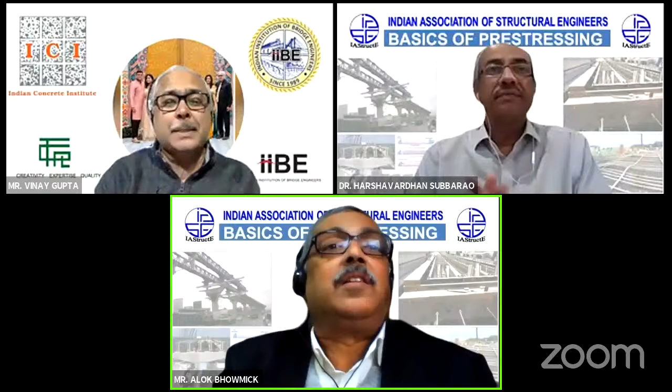This webinar is on a specialized subject, and it has a very wide application in India.

I think since 1955 onwards, we are using pre-stressing. Though many designers or participants here are aware about the method of pre-stress design, very few designers are well aware about the intricacies of the pre-stressing system, its technology, and the art and science of the subject. Very few people go deep into it, and therefore these webinars are really very enriching. I thank Mr. Vinay Gupta for agreeing to share his deep knowledge on the subject.

When I go to many bridge sites where pre-stressing goes on, even now, after so many years of experience in India, I find that either the pre-stressing has not been done properly, or it is not interpreted correctly, and the problem continues. There is a considerable knowledge gap between what should be done and what is practiced, and there are several quality issues related to pre-stressing which need greater understanding for designers. Today is the opportunity for many participants.

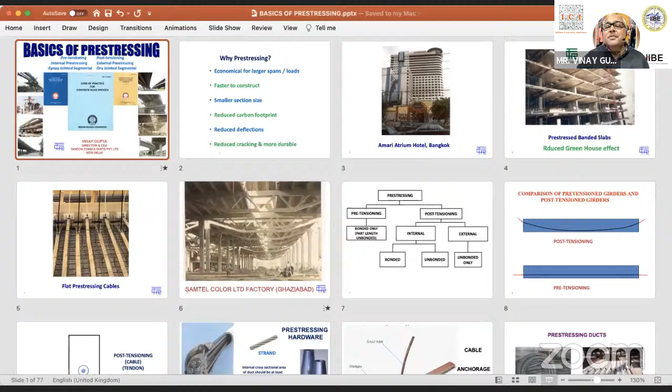Thank you, Dr. Harshavardhan Subbarao. Friends, I must tell you, although Dr. Subbarao has said so many things about me, I don't know right or wrong, whatever it is, but Dr. Harshavardhan Subbarao himself to me is a very nice, sweet, and perfect gentleman friend. And of course, I'm very thankful to IAStructE for giving me this opportunity to present something which I presented in IIBE about, I think, a week or two ago - I think 2 weeks ago perhaps. So my special thanks to IAStructE, of course under the aegis of the President, Mr. Alok Bhowmick, no doubt.

Friends, my presentation today is more elementary level stuff, so I don't expect very learned and senior people to gain much out of it. It's more for students, or those who exercise computers so much that they have forgotten what the reality inside is. Our office engineers too are some of those who just click numbers on the computer, get some results, and think the computer knows more than them. We want to know more than the computer. That's the purpose of today's presentation.

Dr. Harshavardhan already mentioned these two documents, SP65, which is for precast segmental bridges, or other segmental bridges, precast or cast in situ. The other one he mentioned is about pre-tension girders. So we will see what is pre-tension, what is precast, what is epoxy jointed, what is dry jointed, and how pre-stressing differs for each of these items, what is bonded pre-stressing, what is unbonded pre-stressing, and so on.

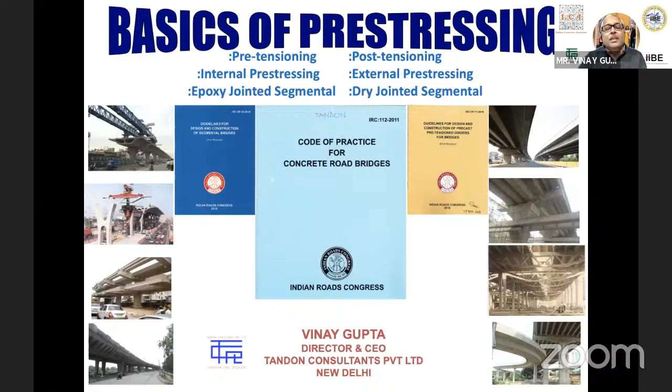Okay, let me see how this works, and let me put it to the pointer laser option.

So, a very simple question: why pre-stressing? Why couldn't it be done with just reinforced concrete or something like that?

When you provide pre-stressing in the case of larger spans, it becomes economical because the material consumption is less, therefore the self-weight is less. When you look at the overall economics of material, dimensions, etc., you find it can take larger loads for a larger span more easily in pre-stressed concrete than in reinforced concrete.

It is faster to construct compared to RCC, simply because with RCC, especially a cast in situ structure, you have to hold the shuttering and scaffolding for 15 to 21 days, 2 to 3 weeks, as per the codal requirements. Whereas with pre-stressing, once the concrete has gained sufficient strength, not time but strength, after 4 or 5 days you get about 80% strength in the range of 35 MPa, 40 MPa, or perhaps 32 MPa. You can decenter it after pre-stressing, which means you can do it much faster.

Section size is smaller, as I just mentioned. Once you reduce the concrete quantity, you reduce the quantity of cement. For every ton of cement manufactured, you produce about 1 ton of carbon dioxide. So once you reduce cement, you reduce carbon dioxide, and you reduce the carbon footprint on the planet.

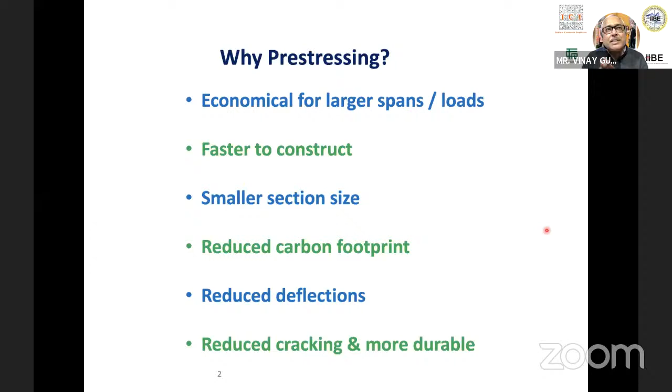When you pre-stress concrete, you act against the applied loadings, and since you do that, the deflections of the structure are reduced. In the process, since you are applying compressive force into the concrete, it leads to reduction in cracking. I would not say zero cracking, because nowadays we permit partial pre-stressing, which will crack also. But with reduced cracking, durability increases, because the passage for water, carbon monoxide, and carbon dioxide to ingress reduces. So it becomes a more durable concrete.

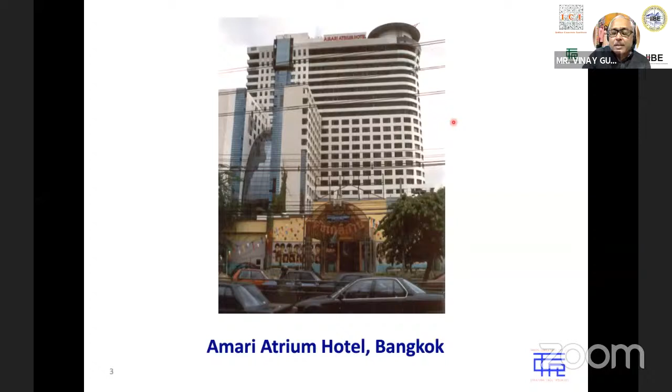I picked an example we did about 30 years ago: a 25-story, 4-star hotel building in Bangkok, the Amari Atrium. You can still go now to Sukhumvit Road and see it. The floors you see here are 20 typical floors with a dimension of 100 meters by 20 meters across the plane of this screen, and of course 20 floors. Now let's see how these were constructed.

The structure, in Bangkok, of course, is in a seismic zone close to nil. The grids of the columns are 8.2 meters longitudinally. The length of 100 meters is from here to the other end. We have these columns just 2 over the width of 20 meters, and these columns are 1.1 meter by, if I remember correctly, 700 millimeters.

Over these columns, we have a pre-stressed banded system. In the banded system, we have beam-type elements which are 40 centimeters deep in this case, in one direction. And we have slabs spanning 8.2 meters, from this column grid to this column grid, 200 mm thick, so 40 centimeters deep band, 20 centimeter slab. This entire floor, each floor, was constructed in 7 to 9 days, 30 years ago.

Today, these bands have pre-stressing longitudinally and transversely, and the slabs have pre-stressing in the other direction, longitudinal to the building. With this whole process, the speed was as high as completing 20 floors, 100 meters by 20 meters, in a matter of 6 months. Now look at the gain: the quantities are minimum, because 40 centimeters depth for a span of 12 meters, with a 4 meter cantilever, is about the minimum one can think of.

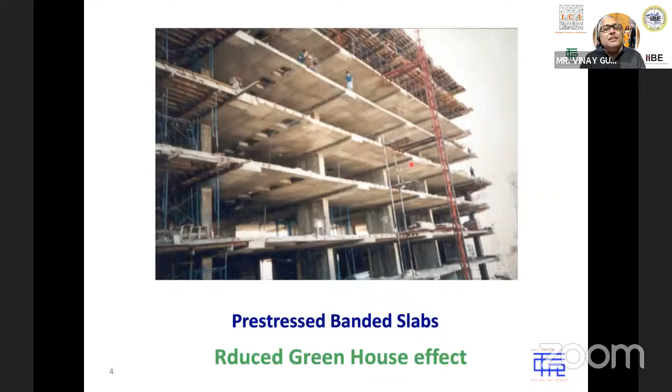A 20 centimeter slab for a span of 8.2 meters, which would normally require about 2.5 to 3 times that thickness, is also about the minimum you can think of. This gives quantity savings and advantages that finally reduce the greenhouse effect on the earth, which is what people talk about nowadays. For a hotel building, if you save the entrepreneur about 3 to 4 weeks per floor, he starts guest entry a year or two earlier, so his gains are enormous. The structure becomes cheaper, faster, and economical, letting the entrepreneur start earning faster. So those are the distinct advantages.

We have seen the normal round pre-stress system with round duct and round anchorage cone. But for slabs with only 4 or 5 strands in a thin slab, like this 200mm one, flat ducts are available where you put these strands depending on the design, spaced about half a meter to a meter apart, and provide pre-stressing. Notice one side has a dead end anchor and the other has the anchorage end, alternating so that we maintain symmetry of forces as far as possible.

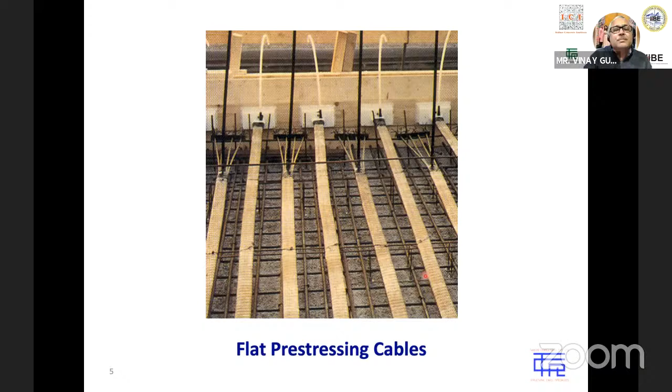This is a post-tensioned concrete truss for a large factory building constructed around 1989-1990, about 30 years ago. The concrete trusses have bracings, a top boom and a bottom boom. The bottom boom, which is in tension, is pre-stressed. Just by this pre-stressing, the whole structure became very fast and light for a span of 25 meters, with a depth of about 2.2 to 2.3 meters, on 10-meter tall columns, with trusses spaced about 10 meters apart. This factory was for manufacturing color picture tubes for old-style TVs, and they wanted to beat the competitors. The factory was constructed in 11 months for 25,000 square meters, 30 years ago, and people were really applauding.

Now let's talk about pre-stressing, back to basics. In pre-stressing, we have two categories: pre-tensioning, where you tension the tendons first and concrete later, and post-tensioning, where you concrete first and then tension the tendons. A tendon, in pre-stressing terms, can be a strand or a cable. Tendon is the common word, whether it's pre-tensioning with strands or post-tensioning with a cable. We'll discuss this further.

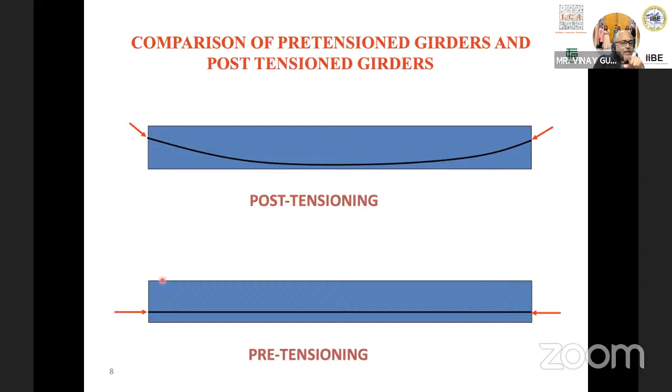So now we just talked about post-tensioning. In post-tensioning, we have a cable. What a cable is, we will see. Around the cable, we have a duct, which can be metallic or high-density polyethylene, HDPE. In this space, we normally provide some grout or the other.

If it's a bonded pre-stress, then we provide cement grout, so that from the cable we have cement attached, from the cement we have the duct, and from the duct we have the concrete. So everything becomes one bonded stuff.

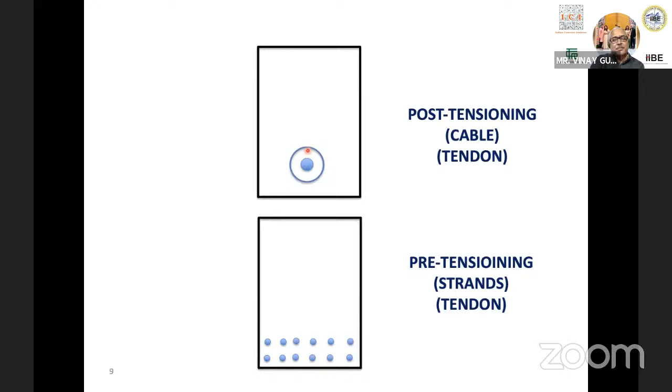If we want an internal unbonded pre-stress, we provide a flexible material like wax or grease, a selected quality wax and grease which have good life, 100 years and all that. Once you put that kind of material, the bonding between the pre-stress and the duct does not take place. Only protection takes place against weathering, because pre-stressing steel can get corroded faster than regular steel due to high stress.

In the case of pre-tensioning, we don't have a cable concept, we have a strand concept. Each strand is placed wherever we have decided to. After the strand is stressed, we pour the concrete, and of course reinforcement is always there already. Once the concrete gains sufficient strength, we release the jacks for the pre-stressing force on the strands to be transferred to the concrete.

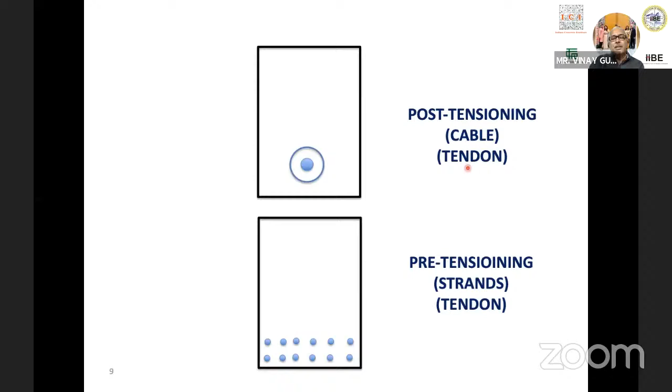You may notice a word, tendon, which is a common term. A tendon may be either in the form of a cable, a grouped cable, or in the form of a strand. International books, literature, and codes use this term tendon rather than strand or cable, because it's a common family of pre-stressing. All right, so let us see what a cable is and what the other things are.

What you see here is a strand. This one is a strand, but this whole thing is a cable. What is a strand? Let us see.

A strand comprises 7 wires. One is a central wire that we see here, and there are 6 outer wires. Stranded together in the factory, they make a strand which is a 7-wire strand, and in these strands, the central wire is 1.5% larger in diameter than the outer 6 wires, and that becomes a twisted strand.

We really feed 7 coils in the factory, 1 central coil, 6 outer coils, and the strand and the wires are pulled from these coils, and there's a rotor which rotates. So as the wires are drawn, the rotor rotates, and that creates a stranding of the 7-wire strand.

So that's a strand. Now, when you say 12T13, a very common one, 13 means it's actually 12.7, which is ½ inch, which is a nominal diameter of each strand. Nominal means this nominal diameter. It is not a solid diameter. It is less than the area of a solid diameter, but a nominal diameter that you get, a round diameter, is 12.7. So that's a strand.

When we have 12 such strands, each one is like this, and there are 12 such, this becomes 12T13, or 12T, some people call it ½ inch also. So that is how this strand is designated.

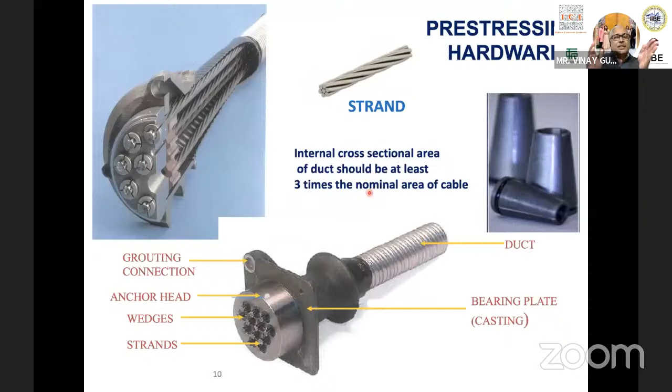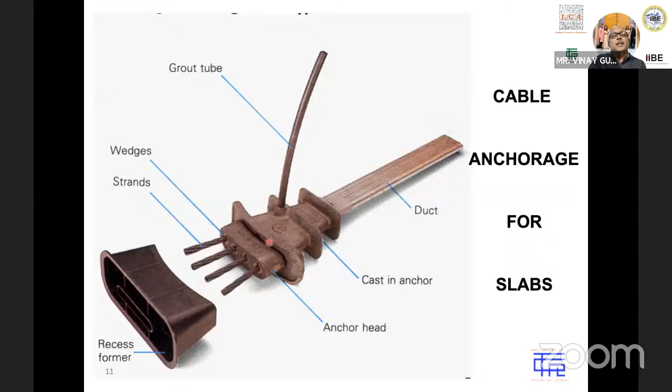This is the one we discussed for the building application, but when you have transverse pre-stressing in a box girder, or even transverse pre-stressing in the case of a spine wing structure, which I'm sure precedents have designed several, and we have also designed and proof-checked a few. In those cases, the slab, which is about 220 or 250 millimeters, uses pre-stressing of this type, with 4 to 5 strands, flat ducts, and a flat kind of anchorage cone assembly. Rest of the things are the same as other cables.

These are pre-stressing ducts. Either they can be metallic, meaning made out of a cold forming process of metallic sheets, where metallic strips are cold formed and interlocked, or they can be high density polyethylene, that is HDPE, which is just extruded material from the factory. Each piece of this HDPE duct is in the range of 6 to 10 meters length.

So each piece you get is 6 to 10 meters long, and after that you need some method to couple the two. The best form is a coupler like this, along with heat shrink tape so that it's slurry tight. No slurry should go into the duct. Or it can be any other system that works efficiently to ensure that cement slurry in the concrete does not go and block the duct, which has happened in many cases.

You see something here? Maybe you'll notice it later on. These are the pipes which are connected to the ducts for grouting, what we talked of earlier. Normally I'm talking of cement grout, but there can be other materials. So for grouting, we provide these kinds of grout pipes right in the beginning.

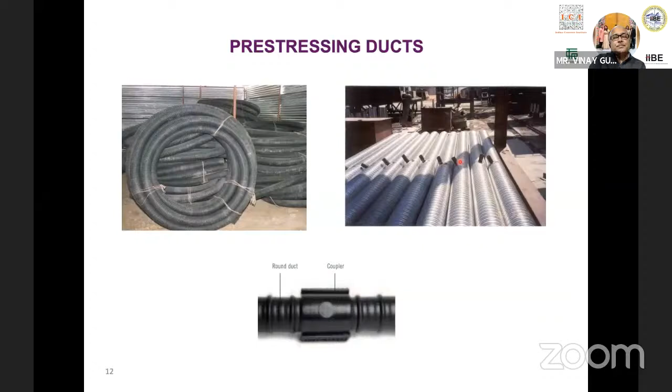Normally strand length can be anything, there's no problem. A strand can be 3 kilometers long also. But the thing is we cannot construct all of it in one go, since construction happens in stages longitudinally. So we can have a coupler like this, but this coupler is quite expensive, keep in mind, as a practical engineer. The other thing more commonly used nowadays is to provide pre-stressing and overlap it, like you would do for reinforcement, in very much the same way.

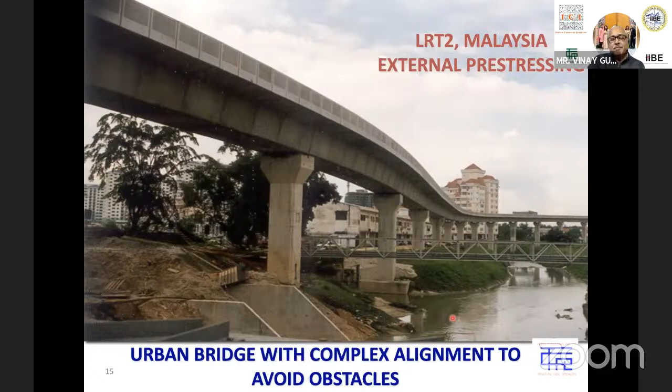This is a project that we did, and I think our president, IES Trustee Mr. Alok Bhowmick, also did parts of this project. He did the Metro in Malaysia in 1995, where we used this external pre-stressing, which means the pre-stressing is inside the hollow space of the box girder.

These are the end diaphragms. There are some deviator blocks in concrete so that the pre-stressing cable can go into the block for a deviation of angle, because you need this deviation since bending moments are more here and less there, and therefore tensions are more here and less there, so the cable has to run in this profile as far as possible. But it is not into the concrete, it is in the hollow space of the box, which looks something like this. So we have a lot of these cables with HDPE ducts.

HDPE is more or less inert, whereas metallic duct or metallic sheathing is not inert, and therefore in external application, metallic sheathing is not permitted at all. It is only HDPE, and for external applications, the requirements of HDPE duct wall thickness are a little more than for internal ones, because they are all by themselves and have to negotiate this deviator block.

As you see, the cables go down, run straight, and then go up somewhere. That's how external pre-stressing works, and where it anchors there is a diaphragm. In the diaphragm, you have an anchorage cone, and the pre-stressing comes here and gets anchored here.

Somebody may ask me, why use external pre-stressing at all? External pre-stressing has an advantage that it can be replaced more easily. So in our codes also, we have permitted external pre-stressing so that you have the distinct advantage of replacement. As I see, that is the only major advantage. But one more advantage we saw in Malaysia was that with external pre-stressing, the speed of construction is higher.

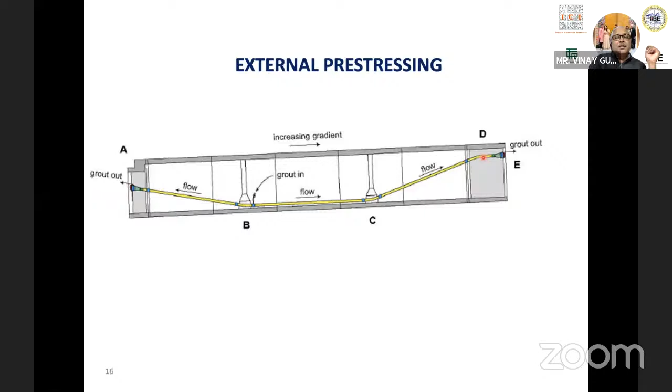Why? Because this pre-stressing cable does not require weathering protection from your concrete. It is not in the concrete at all, it is outside the concrete. So it's a continuous HDPE duct, with its own grout inside. It doesn't require any protection, and therefore there's no risk of these segment joints leaking and causing any problem to the pre-stressing which is inside.

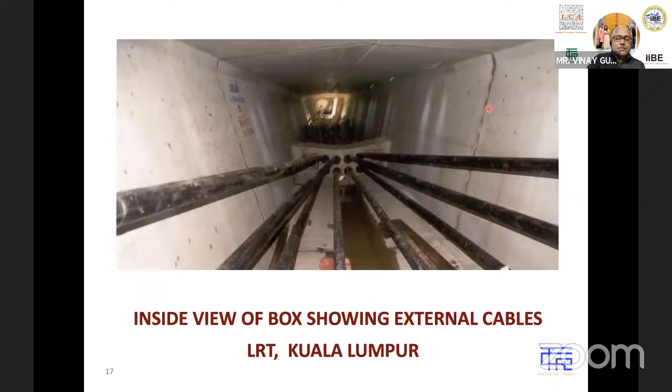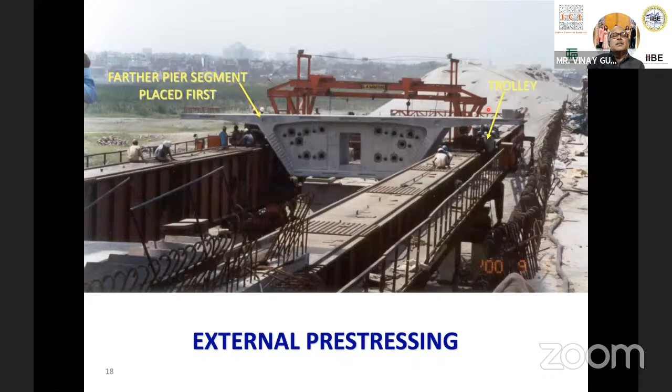Instead, they can be dry jointed. Of course, due to some other analytical reasons, or performance reasons, dry jointed segments are reducing worldwide. Some codes don't even permit it now. But yes, people have used a lot of it, especially in the eastern part of the world.

Okay, let's come to pre-tensioning, the next very common type of pre-stressing in India. So let's discuss this. Of course, you have IRC SP 71 with you.

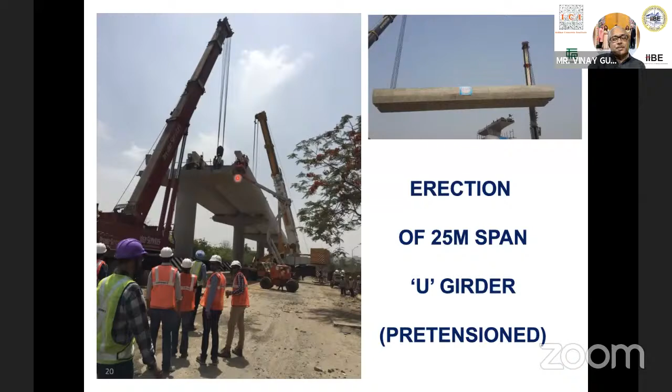Okay, talk of this Bangalore metro. If some of you are from Bangalore - but of course in any city nowadays - these girders at the concourse level, the place where you go and pay your tickets, etc., or these girders which are at the platform level where you alight or board the train, are all precast, pre-tensioned I-girders in this case.

We have found that whenever the number of girders exceeds about 200, pre-tensioning becomes economical in terms of cost. Time-wise, it is always faster than post-tension girders. So we go for pre-tensioning for these cases, but we will see what it entails.

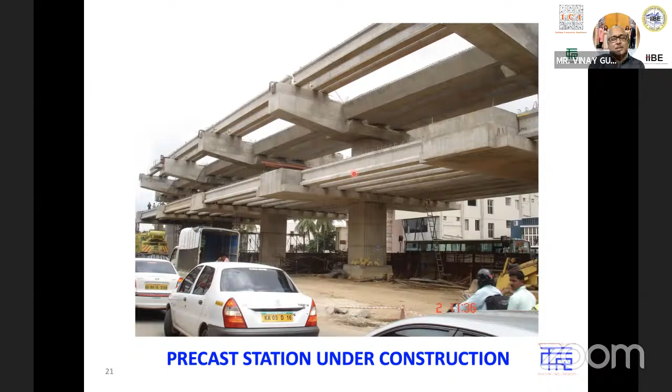Of course, this is one more project, the Delhi-Gurgaon Expressway, 26 kilometers long totally, and about half of it uses these flyovers, long flyovers, as long as 2 kilometers and all that, which use precast, pre-tensioned girders of 25 to 30 meter span, made continuous.

Okay, so since this is a common technique, I thought I would show this here before we go into other types of aspects. What is done here is, as I told you, we have to first stress the strands and then pour concrete.

So what we do is, we have one bed here which can take 3 girders of 30 meters in this particular case of Delhi-Gurgaon Expressway. We have another bed of 3 into 30, and we have 2 other beds of 4 into 25 meter girders here. So totally we have 14 beds available in this particular project.

I'm taking a practical example. The whole thing is made long line, wherein the reinforcement is tied here. There's a Goliath crane that moves, supported here and supported here. It can move all the way from left to right and right to left. It will pick up the reinforcement and drop it into the shutter.

Not drop it, rather drop them one after the other. There are 4 such, 3 such, 3 such, and 4 such. Each of these 25 to 30 meter long reinforcement assemblies, which will be assembled and tied here, will be taken and dropped here.

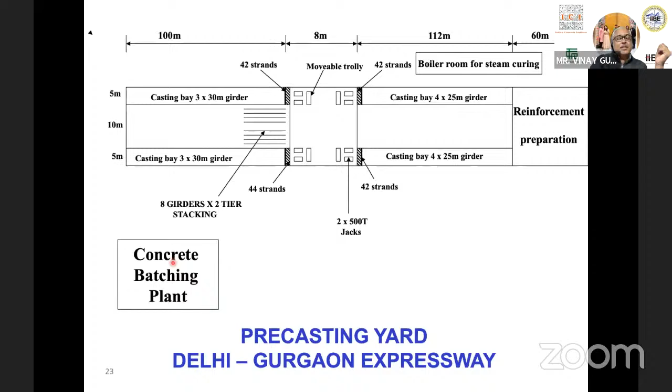And of course, there's a batching plant, and there's also a steam curing plant that we used in this case. With this, we got a construction speed of 3 days per bed. So look at the shuttering here, because speed is important here, and they were producing up to 105 girders per month from these 14 beds.

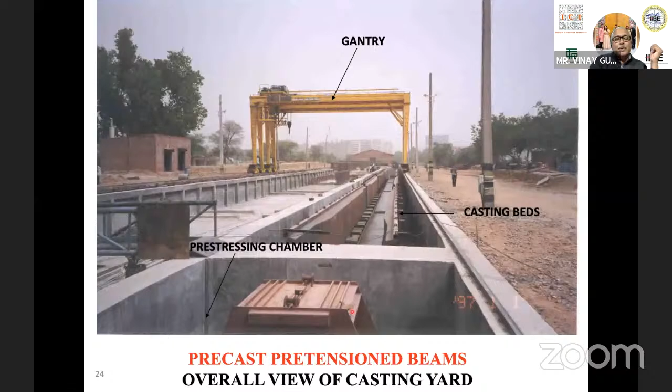As you notice, there's a single piece shutter for 1 girder, another single piece for 1 girder, which can slide in and out quite easily with the help of jacks. And these are the movable trolleys. By putting the jacks here, which you don't see, they can be moved backward. I'll show it to you.

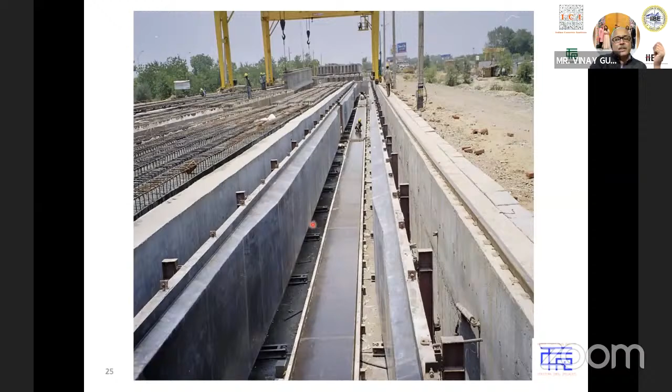This is a closer picture of those shutters, which can slide inside the bottom. The bottom is raised so that this shutter can move in and out quickly. These are those jacks, so these jacks will do the job of pushing the trolley backward. Once the trolley is pushed backward, these strands are pulled this way.

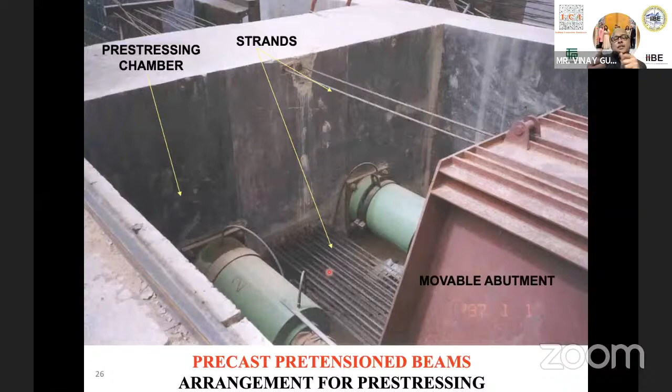This is a stressing end, and this side is a girder. On the left side is a girder which is to be cast. Here the strands, in this case, were in the range of 40 number of strands. They are pulled, and once the strands are pulled, you pour the concrete into the shutter, everything, and the job is done. And of course, once the concrete gains sufficient strength, you can release the jack from here.

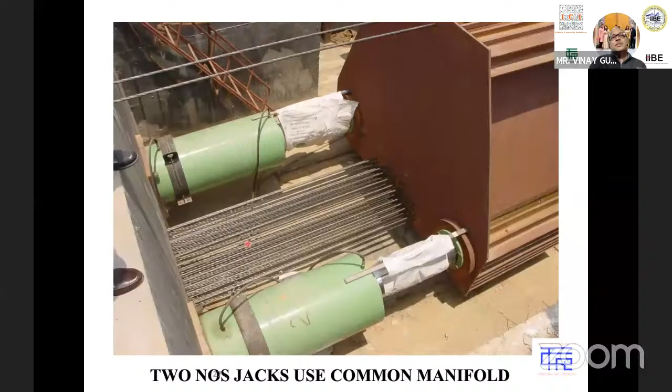The trolley becomes free. The strands get inside, get into the concrete, and there are no wedges, no duct, no grouting in pre-tensioning, and therefore the concrete dimension is smaller. Cost of grout is gone, cost of duct is gone, cost of anchorages is gone, because the anchorages are only engaged into the trolley. This acts like a pre-stressed reinforcement, it just sits in the concrete with the stress.

This is the dead end. Let me keep checking the time. Okay, so this is just one more picture showing the shutter and the reinforcement.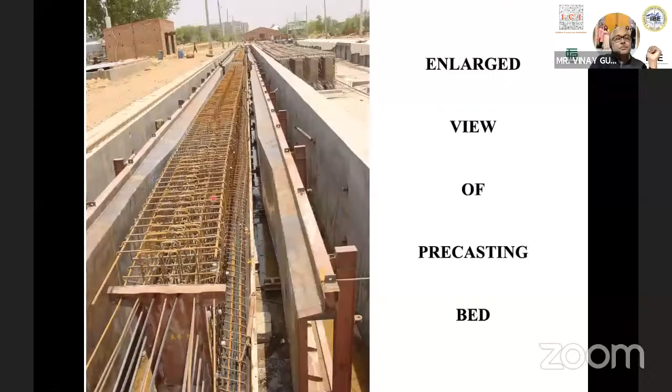This is just the end of the girder. Now, since at the end of the girder we'll be connecting a cast in situ diaphragm, it is important to have the shear strength in a proper way. That is the connection, the construction joint between these precast girders and the diaphragm at the end.

Let me tell you that this entire project with Delhi Gurgaon that I'm discussing with so much passion was completely proof checked by Dr. Harshavardhan Subbarao and his company, and his father, Dr. T.N. Subbarao. My thanks to this team, as they suggested, apart from all the suggestions, how to really do the 100% hacking of these precast girders.

This is manually hacked with a chisel, 100%, in such a way that every aggregate is visible. Otherwise, you may find that in some projects, some structures, there are cracks that are visible, and nobody likes to see cracks. It's always a weakness.

We also do splice girder, which means we make several pieces of precast pre-tension girders and then pour a wet joint for a long span. Like in the case of a 45 meter long girder, each piece is about 9 meters long precast pre-tension girder. After pouring this wet joint concrete, we put a post-tension pre-stressing cable and stress it.

Just a casting picture. All right, so let's take the next one.

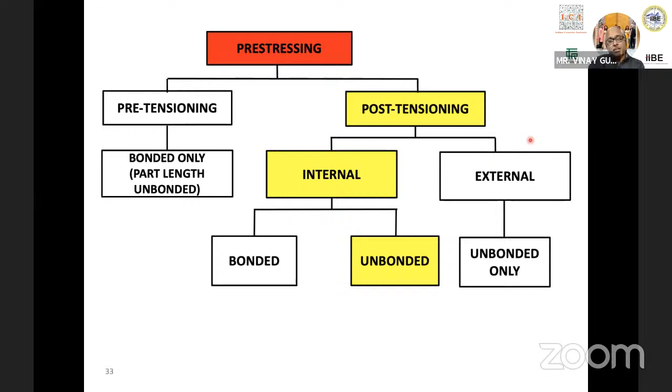That is post-tension, internal, unbonded, which is not common, I must say. I don't think there's any such structure in India, though of course it is there somewhere. I would like to hear from the panelists and other people here about a structure which is internal pre-stressed but unbonded. I have shown you one example, the Bangkok hotel, which is unbonded.

So what we do here is, this being the strand, this being the individual HDPE duct. Between the two, we provide a grease or wax coating. Protection of the strand comes from this coating, but it also permits movement between the HDPE tube and the strand because we have a flexible material. This HDPE tube gets bonded to the concrete around it, but between the strand and the concrete there is no bonding. So the big design difference is that the strains in the concrete are not the same as the strains in the steel at every point.

Unlike what you see as the first assumption in your RCC designs, IS 456, where it is presumed that the strain in the concrete and the steel is the same everywhere. That is fine for bonded pre-stress, but definitely not fine for unbonded pre-stress. So that is one difference, but also an advantage.

Somebody will ask, as a practical engineer, what is my benefit of doing this? It is costlier because compared to cement grout, wax and grease are much more expensive. The advantage is that if these strands get corroded or something happens, you can remove the strand and put in new ones, very much similar to external pre-stressing. Here in unbonded pre-stressing, you can remove the pre-stress and put in new pre-stress, so you can do a replacement therapy.

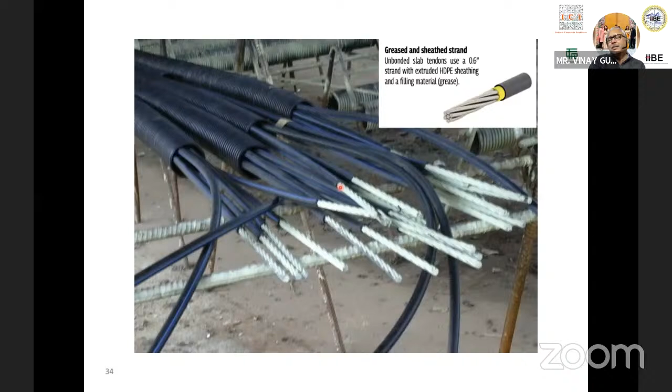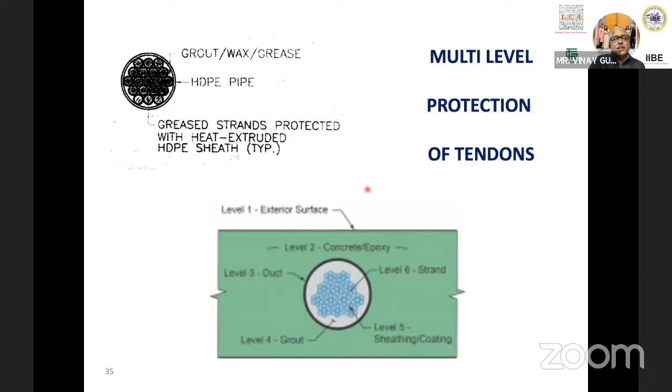So there can be various levels of multi-level protection, we can call it. I think I'll skip this for the moment.

Let's go to the next topic, that is epoxy jointed internal bonded, the regular internal bonded pre-stressing. This is the most common type. I've taken it at the end because I know this is well known to most people.

But of course we'll take segmental, that means precast segmental and cast-in-situ segmental. Now what is segmental? Segmental is something that you do in stages. For example, if you do a cantilever construction and if it is in situ, it's segmental but in situ, or it can be precast segmental, which you see very commonly for metro and many other structures.

This way, for example, this is precast segmental. In this particular case, this being Barapula elevated expressway, proof checked by Dr. T.N. Subbarao and Dr. Harshavardhan Subbarao, the father and son company, consultancy, way back around 2008-2010 for Commonwealth Games 2010. These precast segments are arranged together and post-tensioning is done.

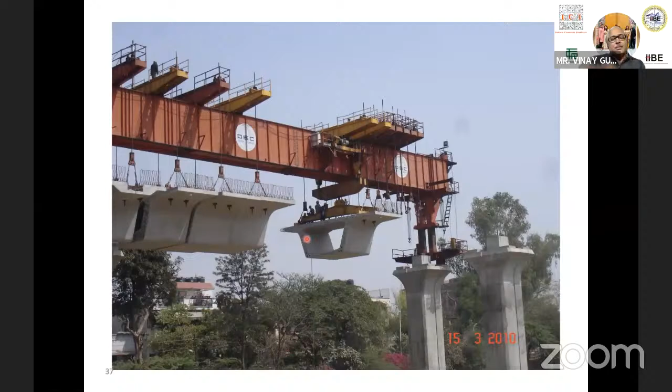In the case of precast segmental or even in situ segmental, your pre-stressing will normally be, or rather only be, post-tensioning. There's no question of pre-tensioning here—you cannot put the cables and strands first and then start concreting. So it's always post-tension. This is another structure.

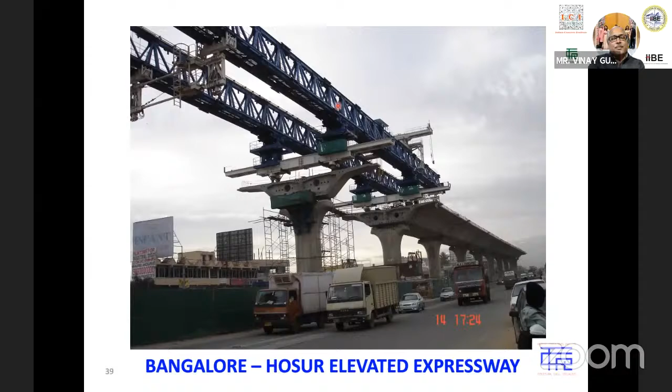If somebody is from Bangalore, from Silk Board Junction to Electronic City, an overhead launching truss, a launching girder, was used, and these precast segmental structures were constructed over 10 kilometers long, in various stages of construction, which is not the forte to discuss right now. But when you use segmental epoxy jointed internal pre-stress, you have to apply epoxy on these surfaces.

Epoxy means resin and hardener combination, like araldite, applied between the segments. To apply that, segments have to be lowered to create a space. After creating the space, you apply epoxy on the surface, then bring the segment up and do a temporary pre-stressing between adjoining segments for 24 hours, so that the epoxy gains the strength in 24 hours, which is just adequate for the proper glue to become effective.

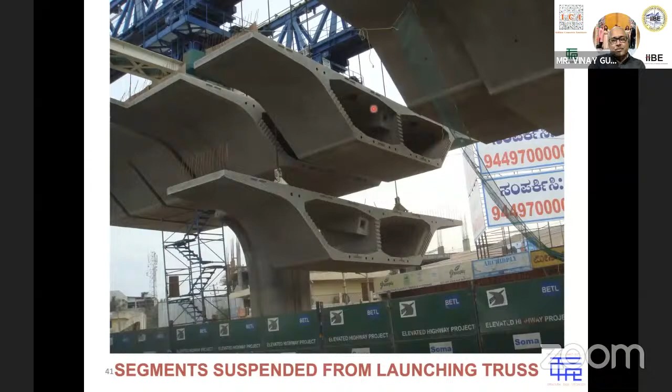Glue means we call it glue, epoxy glue or whatever.

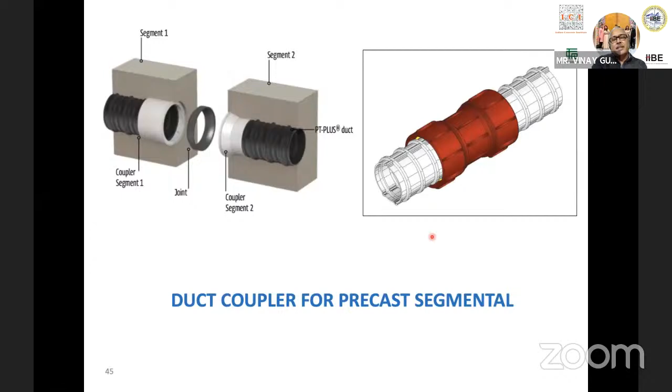Now, if you remember, this HDPE duct is only available in lengths of 6 to 10 meters, not 100 meters, 80 meters, or 50 meters. So they have to have this kind of jointing every now and then, and the jointing has to be very effective so that no cement slurry gets into it.

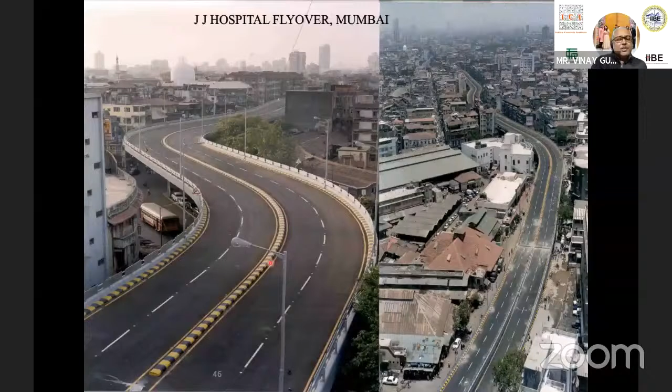I picked up two pictures of another project, a different kind of precast segmental construction, where transversely also it is precast in segments, and longitudinally it is precast segmental as well. So transversely we have a spine which is precast segmental longitudinally, and we have wings attached to it. This is called spine-wing construction, and it's becoming very common nowadays. In fact, IAStructE president Mr. Alok Bhowmick has already designed a few of these, as I mentioned earlier.

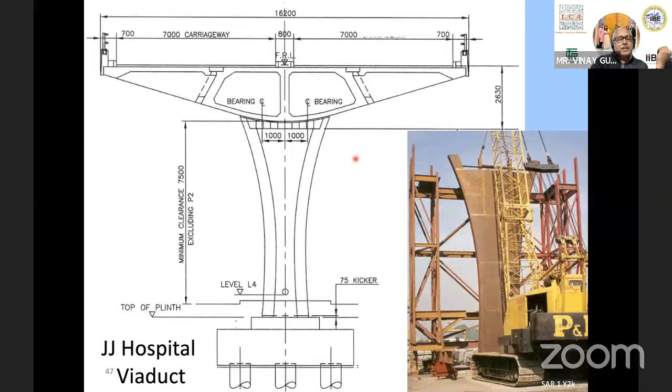You put transverse pre-stressing also in this case, because transversely it is also in 3 segments, so you require pre-stress. This is a wet joint here, so I thought I'd show it. It was first done in India in Mumbai, the JJ Hospital viaduct, 2.5 kilometers long. I think Gammon did the construction, the erstwhile company of Dr. T.N. Subbarao.

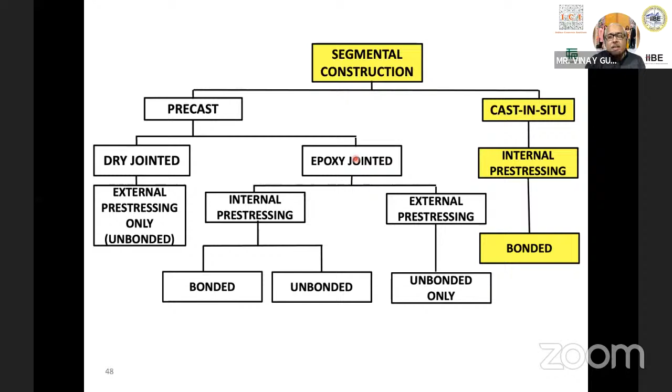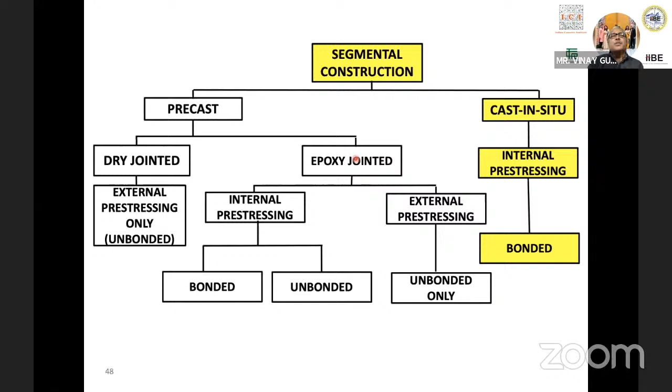Now we discuss a simpler thing: cast-in-situ segmental, internal pre-stressing, bonded, which is mainly cantilever construction that we use very commonly. If you are doing a balanced cantilever construction of some type, you construct about 2 to 4 meters at a time and put in pre-stressing. So when you do this every 3 meters or so, you carry out a segmental construction cast in situ. This is also a segmental construction, keep in mind, and SP65 covers this as well.

Here again, you have to worry about continuation of the ducts for taking the pre-stress cable, because the ducts are jointed one after the other very frequently. So that's important. In this construction, we have a traveling formwork, a truss on top connected to the superstructure here and also here. It's a cantilever which supports the weight of the shutter, concrete, everything, and every time it exerts a downward load and a tension anchored to the deck.

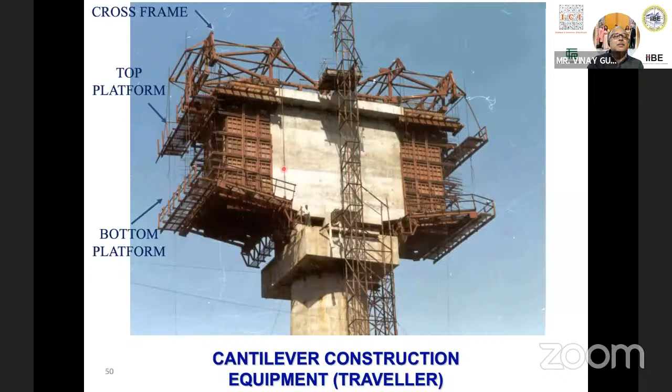You cast this segment and pre-stress it from this end to the other end, then move on to the next segment. That means you move this traveler to the left side, that traveler to the right side, cast the next one, and go on and on. Likewise, you construct what you just saw.

One very important aspect of pre-stressing is grouting. Protection of a pre-stressing cable is a much bigger must than that of a reinforcing bar.

This is because reinforcement is stressed at a low stress of about 300 to 400 MPa, whereas pre-stressing is stressed at something like 2 to 3 times that level, because the basic stress level is say 500 here, 1860 in pre-stress, so that already is about 3.5 times. Then when you put the pre-stressing and it undergoes some losses, even after that, it is in the range of 3 times the stress compared to reinforcing steel.

And when the steel is at a higher stress level, the chances of its corrosion are more. It does corrode more, so it needs better protection.

Now, the fact is that if you talk of internal pre-stressing, post-tensioning, you provide a duct, something like this. I'm assuming there's a support here, so there's a hogging bending moment here, and another support here, so there's a sagging bending moment here. Likewise, this kind of thing continues.

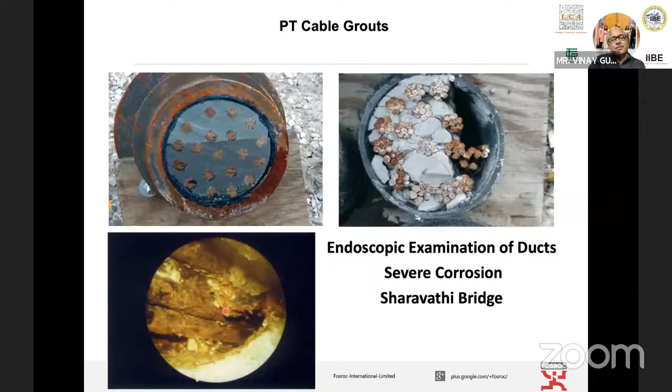So this protection is very important, and for that there are specifications. In terms of material, there is cement, water, non-shrink additive so the whole thing doesn't shrink into the duct and create a separation. There are plasticizers to give high slump so it can travel without holidays, without breaks. There has to be a bleed control stabilizer, because the mix, which is only cement and some admixture, can have excessive bleeding. So to avoid bleeding, you add a bleed control stabilizer, like a viscosity modifying agent used in self-compacting concrete, though of a different kind here. And sometimes, if specifications ask for it, in highly corrosive environments, corrosion inhibitors are added, which can passivate the environment to further prevent corrosion.

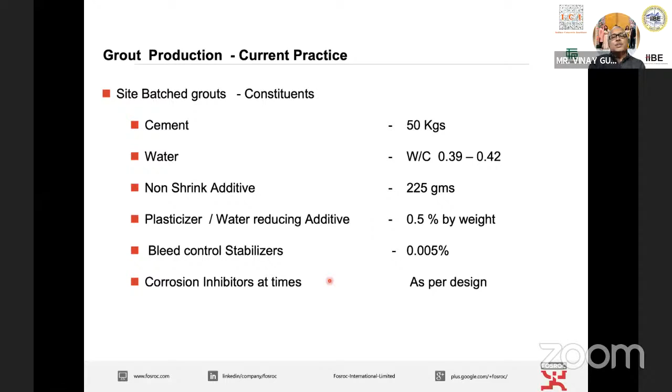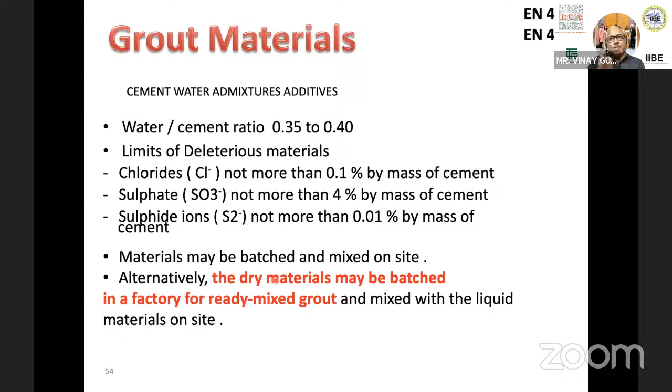And of course, there are specifications, water cement ratio, limits of deleterious materials. Another thing is that in order to avoid the problem of mixing cement and these admixtures, there are ready-made pre-packaged grouts available, which come as a complete mixed powder. You just mix water and use it. They are superior, more expensive, but control is automatically better because they are factory produced. They come in packet powder form.

All right, let's talk of a very important aspect, and I suppose I have 20 minutes total left over. Pre-stressing gives you a lot of advantages, but any good things come at a cost. The cost here is that you end up wasting some more money in pre-stressing due to losses in the force, but you have no choice. It's the behavior of the structure. Unless God is very merciful and 20 or 30 years down the line they make a concrete which is non-shrinking or non-creeping type, we have to live with it.

So the losses are wobble of the duct, that is pre-stressing wobble. The duct may go up and down depending on where it is supported, so it's wobbling up and down. Friction in the duct because of the wall, type of the wall, that is metallic, HDPE and so on, or the type of coating on the pre-stressing cable itself. Sometimes it may be bare, sometimes it may be galvanized or epoxy coated and all that.

Wedge draw-in I discussed and told you. The strands under constant tension undergo a relaxation. That means the force is reduced because they are continuously under tension. Intrinsic particles of the strands undergo some kind of relieving, some kind of relaxation. And that's the relaxation of strand, which is time-based.

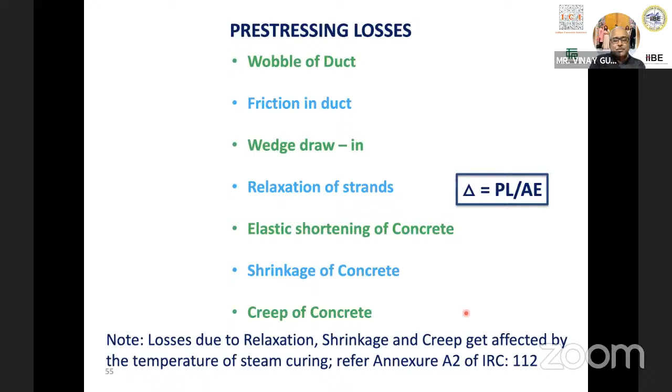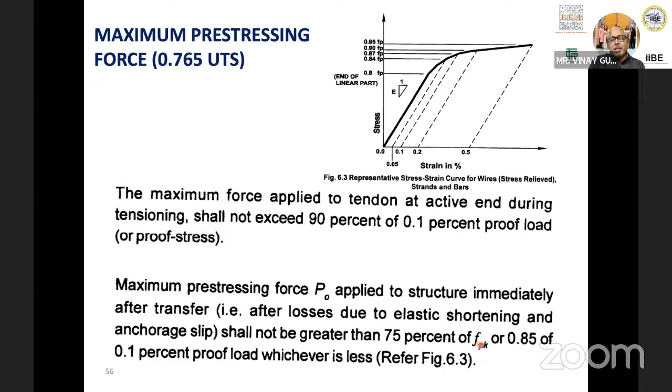Okay, so when we stress a cable, our guiding factors are that the stress in the cable during the stressing operation should not be more than 90% of the 0.1% proof stress or proof load of the cable. 0.1% is 0.85 of ultimate tensile strength. So 90% of that becomes 76.5%. And once you release the jack and the initial setting has taken place, that is elastic shortening and anchorage slip, wedge draw-in, and of course wobble and friction have taken place, then this shall not be greater than 75% of ultimate tensile strength FPK, or 85%. What was 90% here has become 85% after those immediate losses.

Okay, so I think we are quite used to computers. In the computer software, we feed a cable, we get forces, we get some profile, but we normally say, okay, computer is more intelligent than me, and therefore I trust whatever the computer has given. But that should not be the approach. Let us understand.

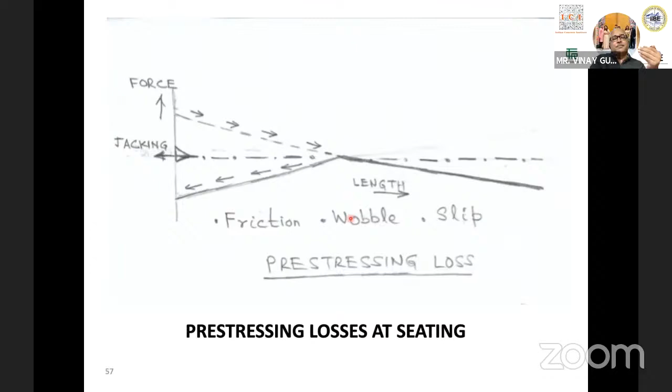The value of mu depends on the surface characteristics of the tendon and the duct, on the configuration of the tendon profile, and on the presence of rust, if any. Rust will cause an increase in the losses.

The value of K for wobble depends on the quality of workmanship and the distance between tendon supports. Keep in mind, the duct has to be supported very often so that it does not go up and down. If it does, losses will increase.

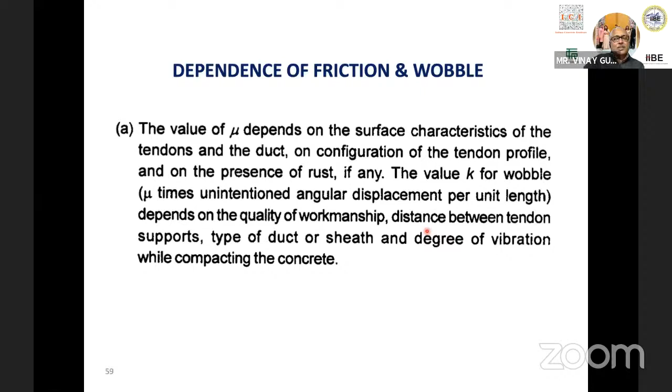In fact, these losses are only a broad estimate. Actual losses may not be the same. They may be less, they may be more. Both possibilities are there, so I'll discuss that also in a while.

Now, talking of the losses of friction and wobble, let's concentrate on stress relieved strands that we normally have. If you have a bright metal or metallic duct, these figures are 0.0046 and 0.25. But the moment you change it to corrugated HDPE duct, it reduces to half, and here it's about two-thirds. So the losses of this kind are lesser in the case of HDPE ducts compared to metallic ducts.

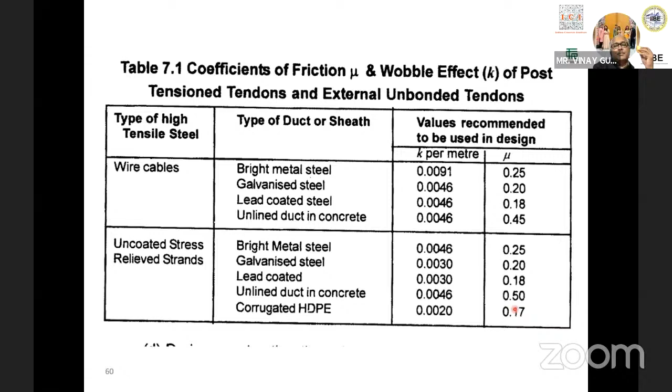All right, so now relaxation of the pre-stressing cable. As I mentioned, you have a pre-stressing cable, you stress it, and you just hold it like this. The length of the strand remains the same, but the force goes on reducing slightly over a period of time.

Slightly means something like 2.5% over 45 days, which is 1000 hours. So if you imagine a constant stress of 0.7 times FPK, where FPK is the ultimate tensile strength, there will be a loss of 2.5% in today's type of strands, that is total relaxation over 1000 hours. Over infinite time, it will be another 2.5 times of it theoretically, so you'll have 6.25%.

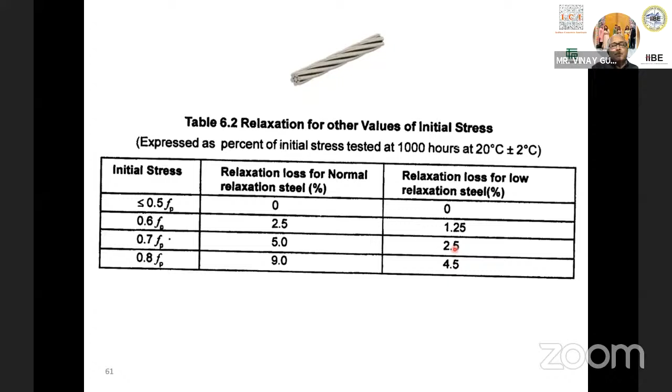And within 1000 hours, if you're dealing with precast pre-tension girders and so on, then for every hour this percentage is given. After 1 hour, it's 37% of the 1000 hour relaxation. After 20 hours, it is 57%. After 500 hours, it is 90%. And after 1000 hours, it is 100%. So the loss is more in the beginning, less later on.

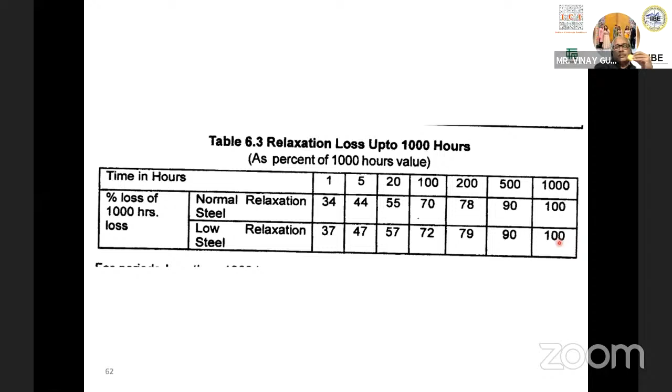Now we talk of another loss, which is also a time-dependent loss. Let's recollect: wobble, friction, wedge draw-in, and elastic shortening of concrete are one-time losses, they don't go on with time. But relaxation loss is time-dependent, shrinkage loss is time-dependent, and creep loss is also time-dependent. It goes on with time, more in the beginning, less later on.

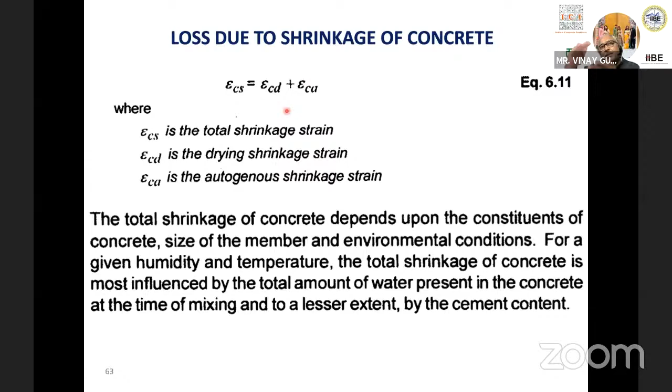In the case of shrinkage, more detailed studies have been made, and shrinkage loss has been divided into two subcategories: autogenous shrinkage, εca, and drying shrinkage. Initially, the concrete has a shrinkage in any case, and that shrinkage is autogenous, happening from within the concrete, defined as εca, which is smaller in quantity. The bigger shrinkage is εcd, drying shrinkage, which happens over a later period of time and continuously keeps on happening. Both these things are calculated.

I will not go into details of it because I'm seeing only 10 minutes left over.

One important thing to notice, both for shrinkage and creep, we find out something called notional size. Notional size is the ratio of the cross-sectional area and the perimeter or periphery. If the perimeter is more, supposing you have a section which is I-shaped, the perimeter is more and area is lesser, so the ratio is lower. When the surface area is higher comparatively, then shrinkage and creep both are more, because there's a larger surface available for atmospheric action in terms of humidity and so on. This parameter, notional size, is two into area of concrete divided by perimeter.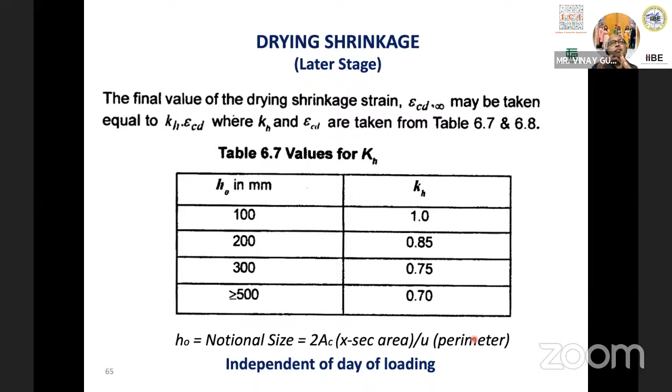If this value is more, meaning area is more, then the loss is lesser because the perimeter is lesser relative to area. So, if you have a circular cross section, it will have the least perimeter for the given area, and in that case, it will have the least loss of shrinkage and creep.

And we have drying shrinkage, which is more. If you see these values, they are going to be higher than the previous values, and therefore drying shrinkage gives you a larger effect. There is a time-based effect of drying shrinkage as well, which is also given in the formula here.

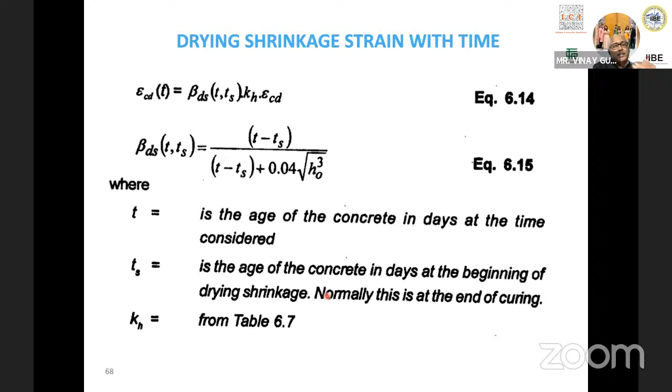Then coming to creep: creep has one more difference, that apart from time, it also depends on the compressive stress applied on the concrete. So stress in concrete, age at loading — that means when you apply the load, when you release the dead weight and live load, and for how much time you maintain it. Dead weight, of course, is maintained till infinity. These are the parameters which come into the calculation of creep.

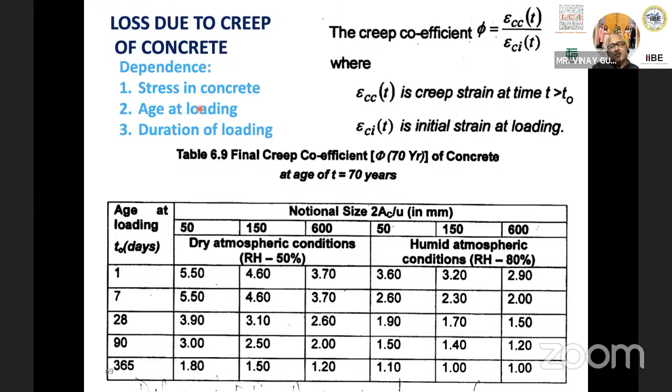On the whole, creep is higher than shrinkage. Now let us look at the comparison: autogeneous shrinkage is lesser, drying shrinkage is more, and creep is much more than shrinkage. But all these losses have to be accounted for because they are properties of concrete today, at least unless some new modifications come to concrete quality which does not shrink or creep. These are the time-based calculations which you do, elaborate calculations.

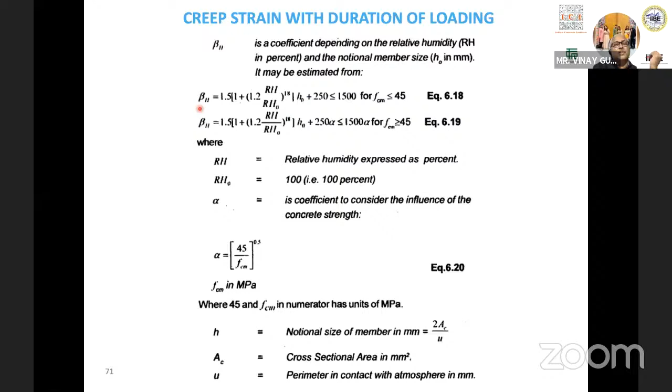As I said, the losses can be less or more. What we do is a nominal loss calculation, but based on the actual properties of concrete, the actual content of cement and aggregate, the type of sheathing wall, and the quantum of rust in the pre-stressing strands or cables — many of these factors affect the losses. Since there is variation in the losses, many times people felt their elongation is not reaching, or is too much. So we say your structure must be safe for a 5% variation of pre-stressing force in the case of pre-tensioning — in pre-tensioning you have less variation because the duct is not there. In post-tensioning it's 10%, so your design must be safe within this range of variation of pre-stressing force, gamma superior and gamma inferior.

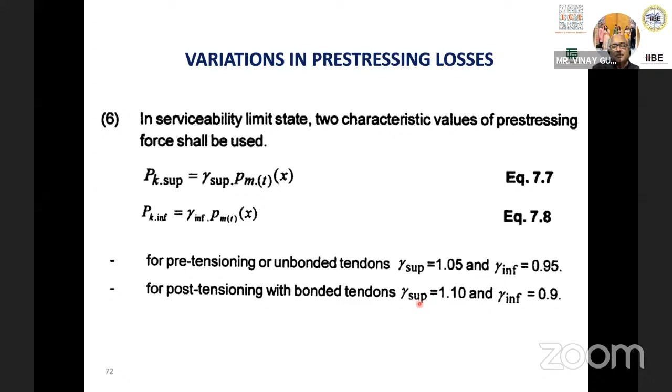I think I'll skip that. Okay.

Partial pre-stressing is not very common, but if it has to be done, for 100% jacking force, the minimum concrete strength fc.str required as per your design and the manufacturer's catalogs must be followed. For 30% of jacking, even then 50% fc.str must be available as the required minimum concrete strength. And if it's between 30% to 100%, you can always interpolate between 0.5 and fc.str.

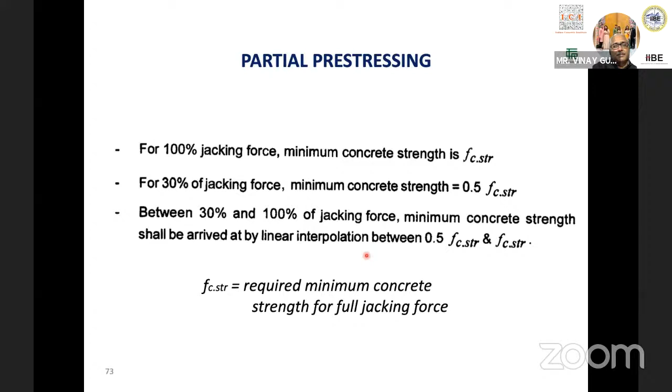For sheathing, there are stipulations in the code as to the thickness of sheathing needed for stability and for reducing wobble effects, and what should be the diameter of the sheathing. When we say diameter, it is always internal. External diameter for this purpose has no meaning.

There should be enough grout in the sheathing for internal pre-stressing and bonded pre-stressing, so that your strand is coated with a thick layer of cement slurry. That's how a good sheathing diameter works. It should not be too thin, because if it is too thin, some strands may not get any grout around them.

In the case of HDPE sheathing, the stipulations are different because the thickness of the wall is more, but it is less strong in that sense.

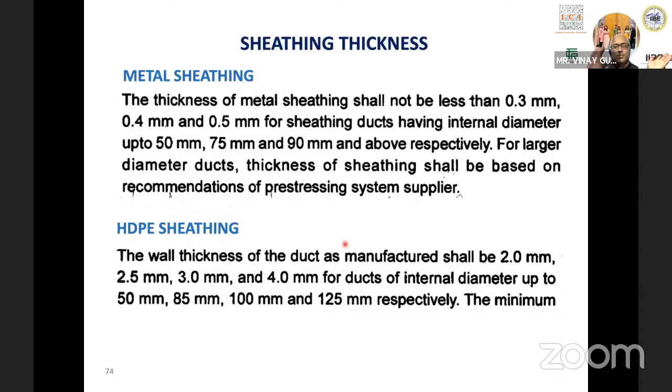When you work out things like how to decide the subtraction of the duct diameter for the thickness of the web for shear, etc., there you go with the outer diameter. So whatever loss you calculate on account of the sheathing is based on the outer diameter, not the inner. This clarification may soon come in the code, because currently it just says diameter without specifying inner or outer.

All right, so let's come to perhaps the last slide, I hope — the end block. I have seen umpteen number of cases where end blocks have failed.

In the past, talking of 30 to 40 years ago, which is my professional span so far, there was a practice that the end block was constructed as a precast member separately and brought to the site, so you could achieve very good quality, compact and properly vibrated concrete. But nowadays that practice is more or less extinct, and we cast it in situ right there as an end block.

The issue with the end block is that we have a good amount of force from the pre-stressing jack and the pre-stressing cable, which may be as much as 500 tons, 300 tons, even 700 or 800 tons, for each cable.

Now imagine, just look at a building. Typically a column takes a load of 100 to 500 tons, maybe 1000 tons. Even a bridge column will have 1000 to 2000 tons of load. Here at one point, you exert a force which is approximately 500,000... it's a huge amount of force.

Once that happens, and there are normally many such cables and anchorages, at every about 400 mm or so, you get a concentrated compression which tends to cause transverse splitting of the concrete. Just imagine a concrete log — if you apply stress on it, it will tend to split transversely, perpendicular to the applied force.

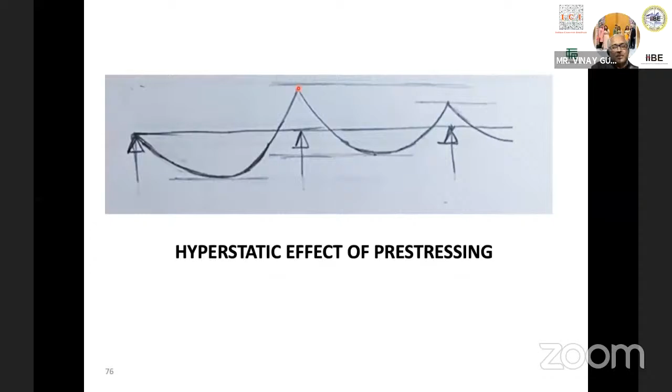So I don't know whether I went too deep, too fast. I have no idea, but I tried to square up. But I'm available as much as you want, as long as you want.

Thank you, Vinay. Thank you.

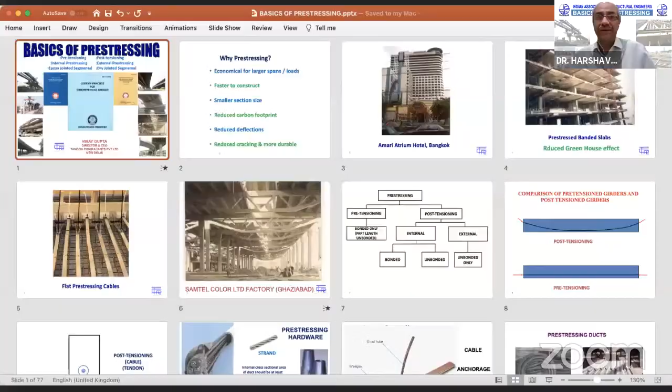I'm sure all our budding bridge engineers and our senior bridge engineers, many of whom I see in the participants list, are grateful for your presence today. I'm sure you've been treated to a treatise on the most essential things, many of which we always overlook - a few very simple do's and don'ts.

For example, making sure that between anchorages concrete is elastic, and between anchorages tension may develop, and your RCC and reinforcement at the end at the anchorage zones is so important.

And the other thing about durability and grout - all these simple do's and don'ts - I would say our Vinay has given us a gentle, easy way of understanding these things and putting it into a story format rather than throwing absolute numbers and values at you. The issue is to understand the phenomena, the issue is to understand those do's and don'ts.

What he really highlighted was what sort of protection you need to take, what sort of the kind of different types of pre-stressing would be. A simple idea was, for example, 200 girders - if you have more than 200 girders, then obviously you'll go for a precast pre-tensioned system, fully precast beams, I-girder beams, like was done on Delhi-Gurgaon Expressway.

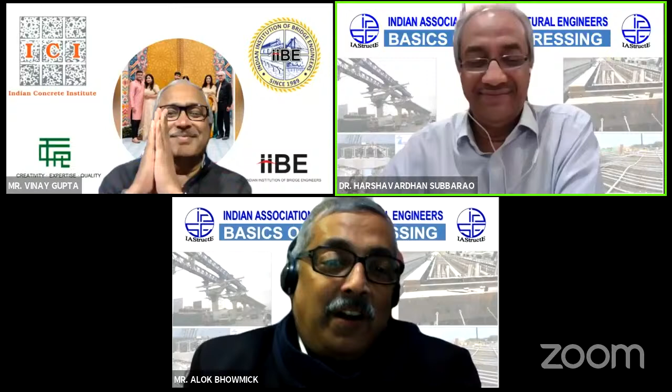I just wanted to say that it was a fascinating presentation, Vinay. I think nobody could have done a better job than you in covering the entire gamut of pre-stressing in such a short time. Practically you have left nothing, and you have touched the nuts and bolts of pre-stressing, as one of the commentators, Mr. Hegde, mentioned in the chat box, and I fully agree with Mr. Hegde. Excellent presentation. Thank you. This is a rare kind of presentation. Only a practicing engineer can give this kind of presentation. No academic institution can give you anything as detailed as this one, as far as pre-stressing is concerned.

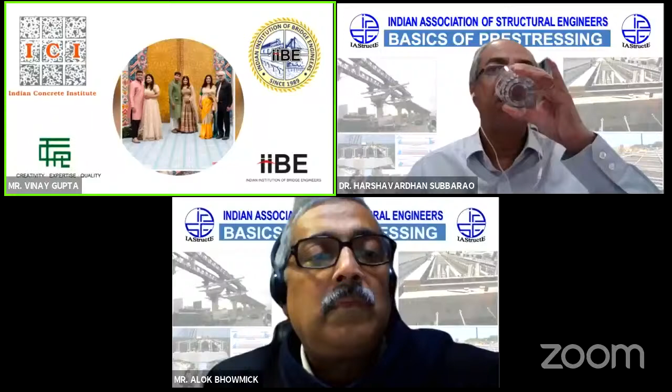In silos and chimneys, mainly in silos, what they do is take a single cable around and then crisscross it at the anchorage, so there are two separate anchorages. There's no very special system beyond that.

Let's move to grouting of HDPE pipe in post-tensioning. Mr. Pant is asking what the strength of the grout should be, and after grouting, how many days it takes before the bottom shutter can be removed.

After grouting, it should gain sufficient strength, but the bottom shutter can actually be removed anytime—there's no such criteria. You can even remove the bottom shutter after pre-stressing and grout later. The strength of the grout, if I remember correctly, is about 40 MPa—I could be wrong, I'll recheck my slides, but it's around 40 MPa. There's also high strength grout available; for concrete grades like M75 and M80, there are special high strength grout formulations as well.

Mayank Ghoshal asked: given the high amount of construction in India, we see relatively fewer comparable precast constructions with respect to cast-in-situ construction. Could you cite the reasons, apart from politically sensitive cases?

I'd like to add one point before throwing it to the panelists: the reality is it's mostly precast. If you look at the metros, there are huge casting yards, and the superstructures are precast in most metro constructions, except for some difficult spans that are highly curved or have local constraints. Those are dealt with using cast-in-situ or balanced cantilever construction, but not otherwise. It's impossible to build large metros without full precasting, and any large structure without full precasting is essentially impossible.

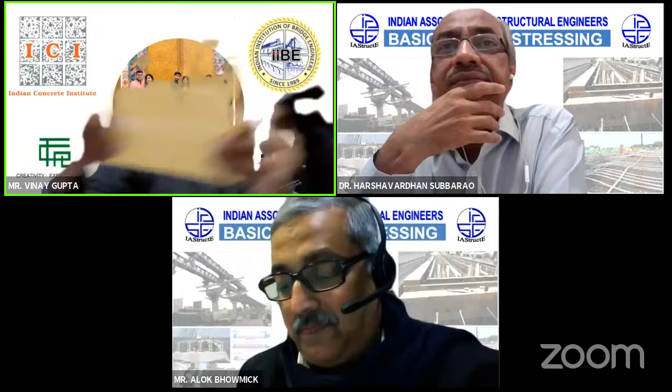So we are still trying to see whether to bring this in here or not, because we have to see the practical difficulty as well, and understand the theoretical rationale behind it. As of now, IRC code does not have a limit, but international codes, at least AASHTO, does. So there is a limit in AASHTO, not in our code at the moment. We are considering whether to put it in or not, that debate is on in the committee. Vinay, I think it is there, have you brought it in? How much is the limit? 33%, I think, if I remember correctly. It must be a recent development.

Just have a look, if you have the clause number we could give that. I think you go on further, in the meantime I'm trying to find it out.

So Sunil Kand, whose father was legendary CV Kand of the CV Kand company, a dear friend, is asking: are there any measurement methods for loss of pre-stressing using embedded sensors that are in place during construction or maintenance? Loss of pre-stress, can we embed some sensors to understand its progressive loss with time? Is there any method of knowing that?

Yes, you do have load cells which are now available and are instrumented into the anchorage blocks itself, and that will give you a global idea of the loss of pre-stress in that particular cable. There are various indirect methods, Sunil. Of course, there's the trepanning method, and there's the Gifford system. There are many systems in which we can core a hole in the concrete, and measure the relief of stresses due to that hole and the increase in stress concentration around the periphery, and indirectly measure the strains to work out the state of stress in the concrete at that location. These are techniques that are available. Either you put in a load cell at the start and monitor it over time, or post de facto in the structure in service, you can do the trepanning method type of concept and infer the change in strain to the state of stress at that point.